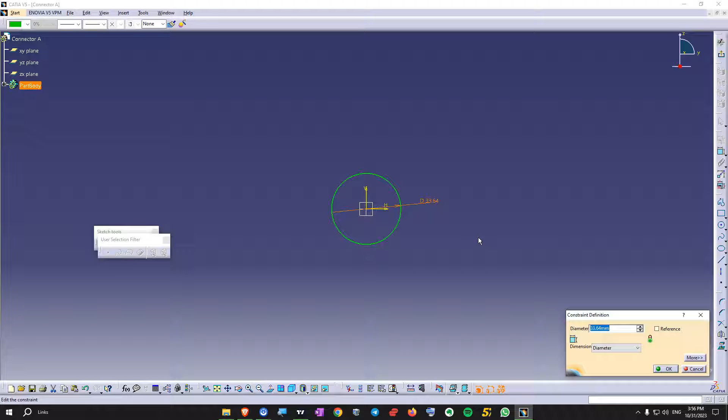First here I'm going to open a new part file. I'm going to call this file connector A. Click OK. So here we have connector A, and I'm going to draw a quick rectangle that is going to represent a connector. In fact, I'm going to make a cylindrical connector, I think it's easier. So in here, let's make the diameter of this, let's say it's 30. Exit this sketch, and I'm going to use the pad to make this longer. Let's see how much longer. Let's make this 80 millimeters.

This should be okay. So you need to know part design and assembly design in order to manipulate files, to modify files, and also to draw electrical objects like connectors, supports and other stuff, because sometimes maybe you need to design them yourself. Most of the times you're going to find those already to be downloaded as a step file from the supplier's website, and that's the first thing that you need to check, because the supplier has the perfect 3D model of that connector.

In my courses I show how to go on various international websites, how to actually go on the website of those suppliers and download connectors. So in my course there are a lot of connectors that you can download already from the videos. So this is the connector that we have.

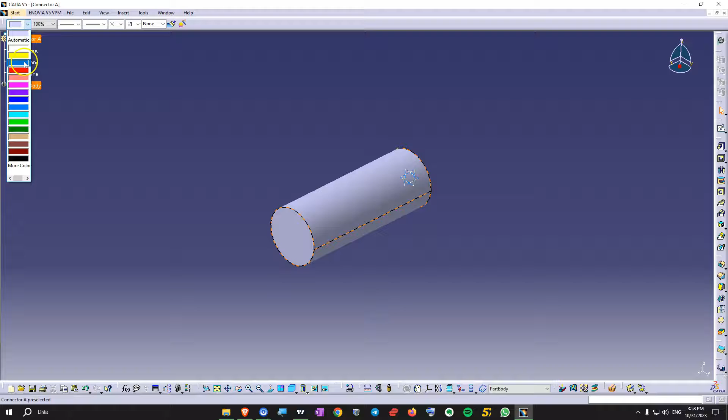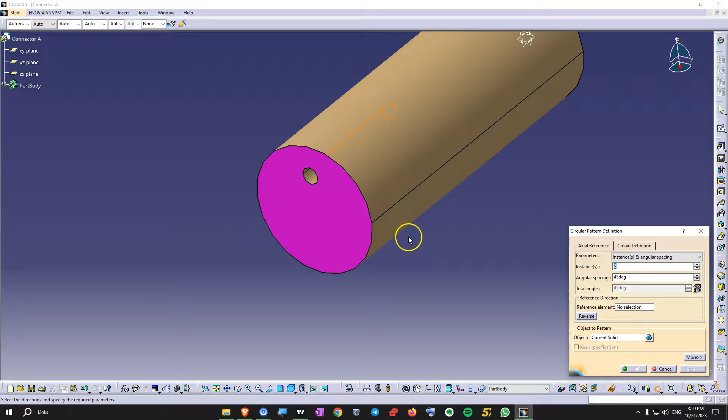Let's give this a color. So let's make this color, and I'm going to click on this face and give it another color. I'm going to imagine that this is the face that is going to connect, and in fact I can position a sketch here and just add a smaller circle. Let's make this 4 millimeters, should be okay. Let's make a pad here and make this 30 millimeters. So then from here I can just execute a circular pattern. Okay, so let's say this connector has 4 pins like here, and now I'm just going to hide the planes.

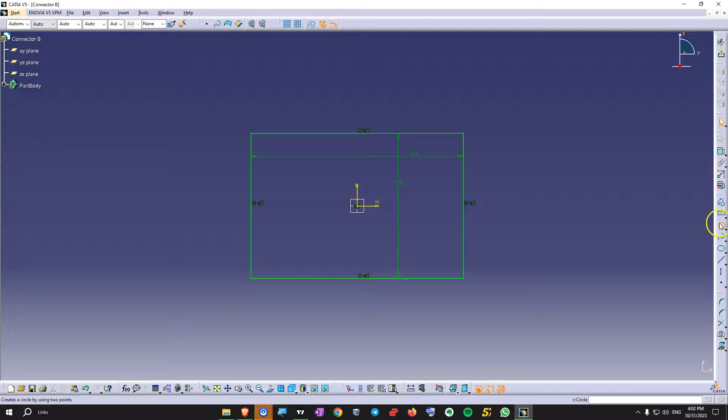I don't want to see them for now, and just save this somewhere in a folder. Save. So now let's make another file, another part file, connector B. This time I'm going to make a rectangle. And I would like to already design the counterpart for this connector. So I'm going to add here right in the middle something that is going to be 30 millimeters, but I would like this to be smaller. So let's make this, let's say 90, 90, and also this one. In fact, let's make this 70. So this is going to be the counterpart of the connector.

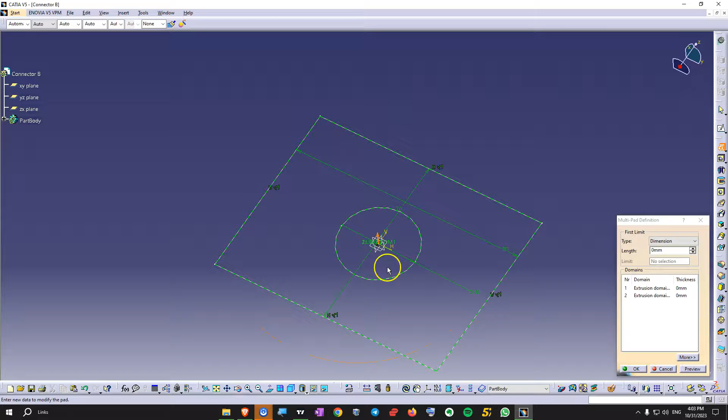Exit this sketch, and I would like to use here multipad. Let's make this one okay. So this one it's 40, connector is 80. Let's make this thicker.

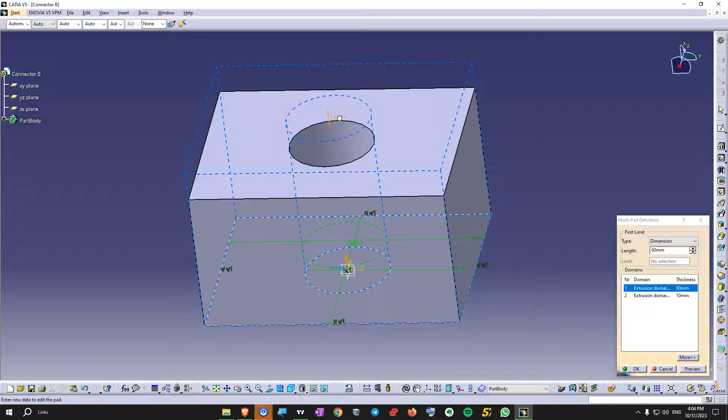So I'm going to hide the planes here, change the color, and inside here I'd also like to change the color like this, just so we can see. So those are the two connectors.

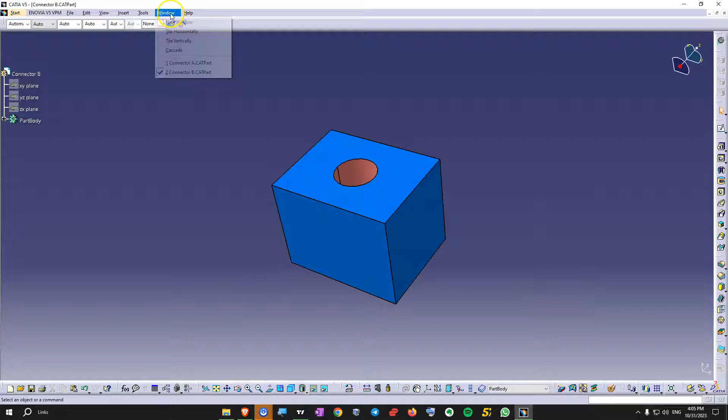I'm also going to save this, and I like to make those very simple, so as not to make this video too long, but this applies to every kind of connector you have. You just need to study the connectors and have electrical knowledge and know how connectors work in order to electrify them correctly, and I show a lot of that knowledge in the courses. That's why I'm trying to show here how the software works, to see how simple the software is, but it's not about the software. So now let's make a new product.

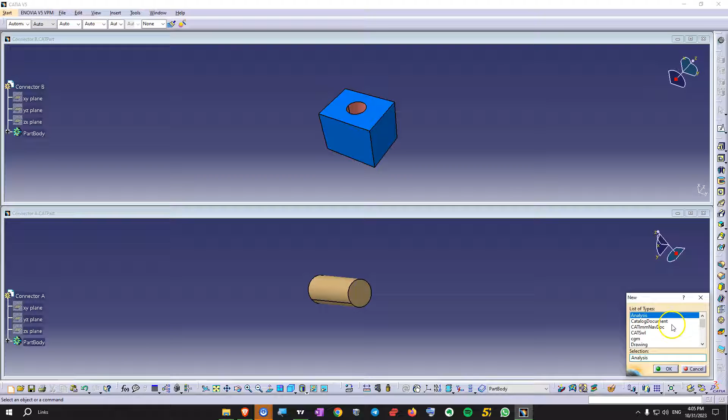So this product is going to be the electrical harness number 1, and I would like to make another product, and let's name this the project file. So this is like a basic organization of files in a Catia V5 electrical.

So those are not electrified yet. As you can see, those are made in part design and assembly design, because this is how it starts, and the electrical workbenches are going to transform those files into electrical files. But first you need to organize them.

Of course, you can make top-down construction, you can make bottom-up construction, you can be mixed. It doesn't even matter, if you know what you're doing. I know that many courses have this approach to Catia V5, and I've been asked by students, how do you do top-down assembly, how do you do bottom-up assembly? I explain that in the courses, and it just does not matter how you do it as long as you know what you're doing.

So in here, this is going to be the electrical harness. I'm going to add the electrical components into the electrical harness file. So I'm going to add this here and this one here with copy paste. This is basic Catia stuff. This is something you should need to know if you want to learn electrical harness. Otherwise you have to take my basic Catia V5 course.

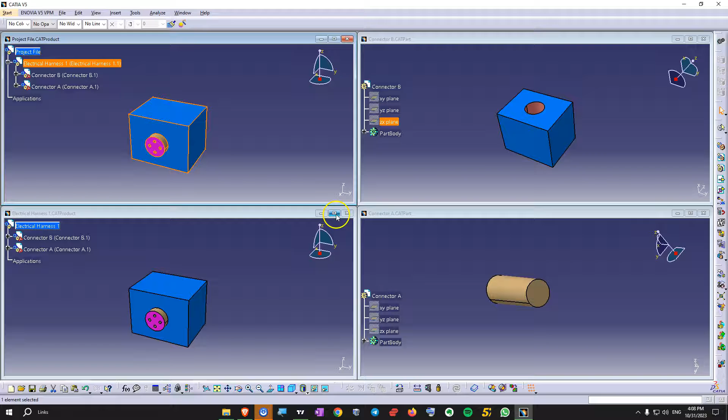And then this product, I'm going to add it into the project file. So here there are all of them, and I'm going to close just this one. But first of all, I would like to save all of them, so I can save here, because this is the general file. Save management. I look here, what's saved, what's not saved. Save as, this is a new file.

Save. Save, in the same folder. And the modified one, save. This is just open, it's not modified. And then click OK, so you can click again to verify. So now everything is saved.

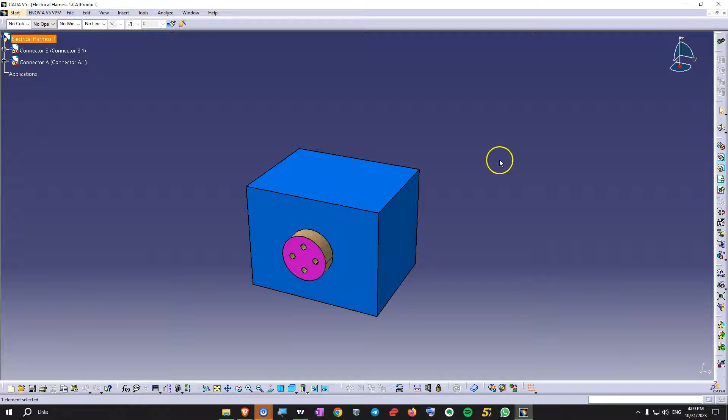And of course you can also check the folder to see that the files are in there. So in here, depending how you construct the files and how you have the datum planes, when you copy paste them, they might all come in the same position, but you can have a design standard to have them all also in the right orientation. That's also something that I teach in the course.

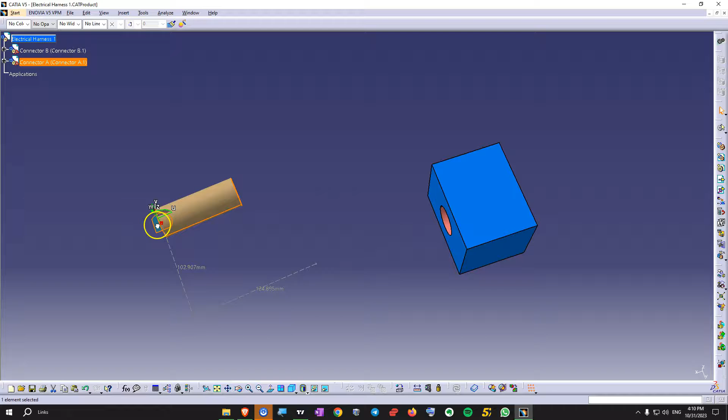It's a little too much to explain here. Maybe I'm going to make a separate video about it. Let me know in the comments if you understand what that is, and if you want a separate video.

So those are the two connectors, and now I'm going to go to the individual files and electrify them first. So this is the project file, electrical harness file. I want to close this one because I don't need it. So the idea here is that you need to make those files in such a way that they can be connected with a click, and also that we can connect wires.

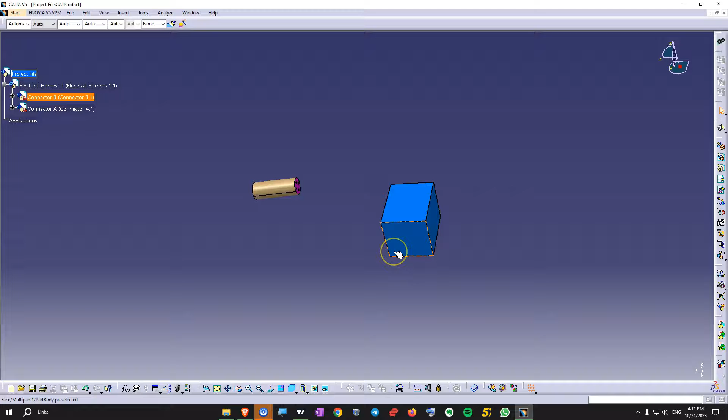So if I go into equipment and systems, electrical harness discipline here, and here we do electrical assembly design. Here on this toolbar, that is called electrical connection point definition, we have two buttons that are called connect electrical devices and disconnect electrical devices.

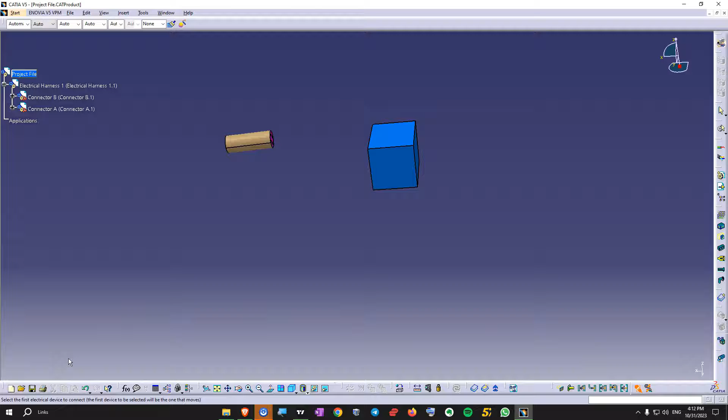So if I click on this one, the software says select the first electrical device to connect. The first device to be selected will be the one that moves. So if I select the electrical device and then I select the second one, they are going to connect between them, and the first one I click is going to be the one that moves to the other one. So now I cannot do that because those are not electrified.

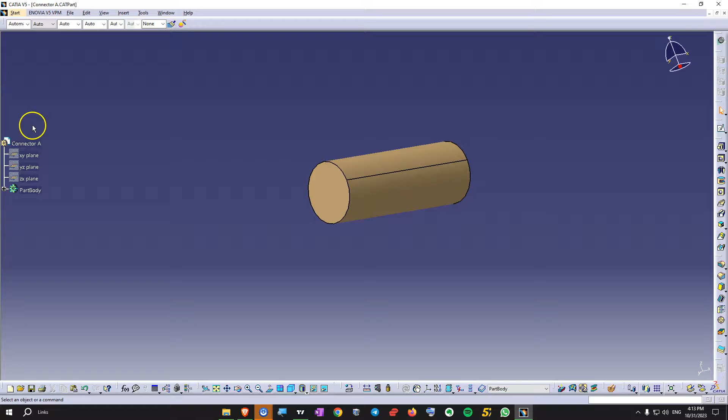I'm going to proceed to the first connector A, and we are going to electrify this. First, you need to make sure that the file is saved and that all the mechanical modifications are made. Then with the connector open, we go to equipment and systems, harness discipline, electrical part design. So this is the part design workbench, equivalent to part design, but as an electrical workbench.

So in part design, you build it from a mechanical point of view, from a solid point of view, and then when we switch to electrical part design, we give it electrical properties. So you see the buttons here change. So the idea is, on the front of the connector, we want to give electrical properties that is going to connect this connector with its counterpart.

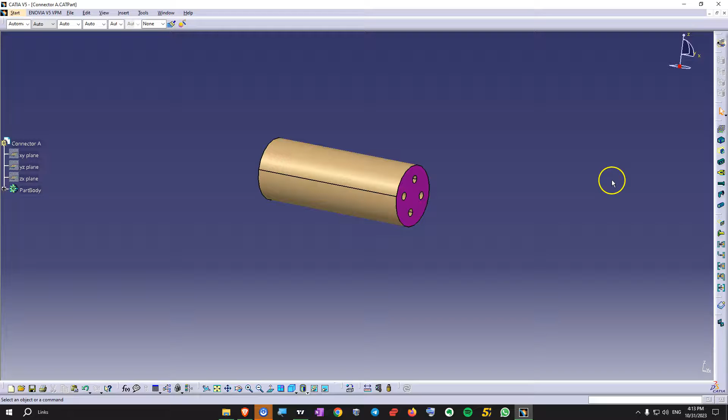And at the bottom here, or on the back side, we want to give electrical properties that are going to connect to a wire bundle or to an electrical wire. So let's start with this one. First, we need to define this part as a connector.

And this is the toolbar where you can do that. So if you look here on all those buttons, I have here define connector. I click on this one and the software says select a part with no electrical behavior, so a part that is not electrified. I select this one, and I have some options here, single insert connector.

We have other stuff here that I teach in the course, but for part number, I'm just going to leave it like this. Number of terminations means the number of pins that the connector has, or terminations. If you're an electrical engineer, you should know what those are. Now I'm going to just put here 4 and click OK.

You want to make sure that you do not mess this up, because you cannot modify or delete them. You need a backup of the file, so you need to delete the file from the computer and restart with the backup. Some of them can be deleted or modified, but some of them cannot. This is another question that I get from time to time, even if I explain it very clearly in the course.

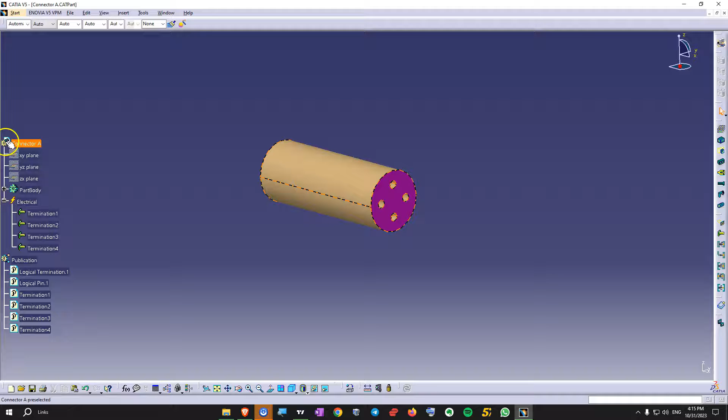Now you see here it's like a small extra thing on this icon. This means this is an electrical part or connector, so in fact it's the icon of the connector here. And now this one has electrical properties with 4 terminations. Those are important for other workbenches that connect with the diagram, the electrical diagram software.

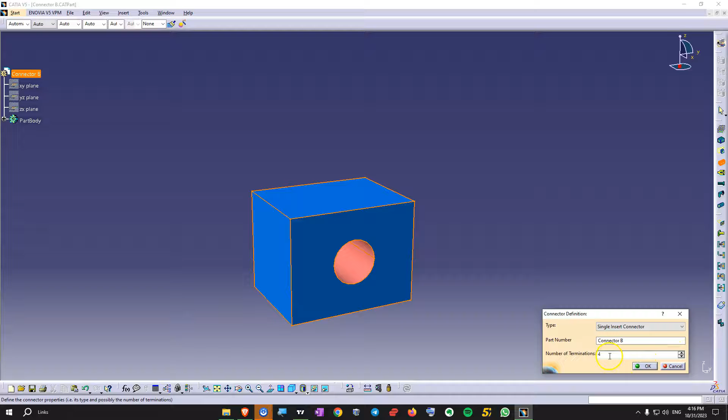Now I would like to save this and switch to connector B here. Let's do the same, let's define this as a connector. I'm going to click on this. Connector B needs to have the same number of terminations. If you do not have the same number of terminations, the software is going to tell you, because that does not make sense in reality. Click OK, I'm going to save this.

So this is just the definition. Now if I switch back to connector A, I need to make the connector connection point. So this is the point, this is what the software is going to use to connect this with its counterpart. And here we have different connection points.

This one is defined connector connection point. If I click on it, it says select a single connector, a multi-connector, or a connector connection point. If I click on this one, because this is defined as a connector, we have here connector connection point 1. This is the automatic name that I'm not going to change. We have representation, contact, coincidence, and orientation, and those are placement constraints. They work like the constraints in assembly design.

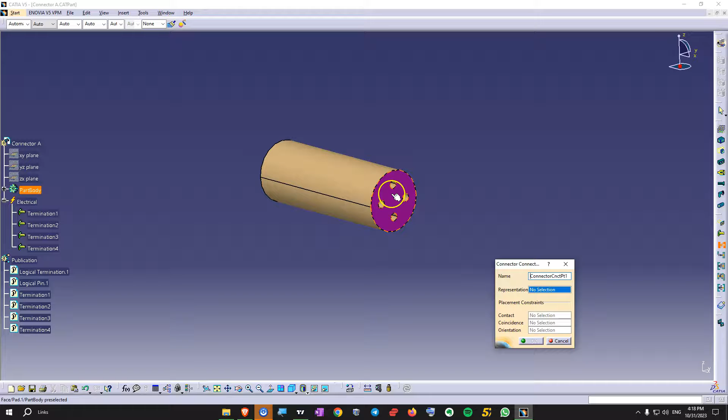So the representation is going to be the face where I want this connection point to be annotated in 3D. I'm going to choose this side, because on the other side maybe I have another type of connection point. So I'm going to choose this surface.

Then the contact is going to be the head of the connector, that basically when you push it into its counterpart, the contact is going to be a surface that stops the connector from being pushed forward. So it can be the face of the connector, or it can have like an edge. In this case we do not have an edge. We can design one, but I'm going to choose the same surface, the head of the connector. This is going to stop the connector from being pushed forward.

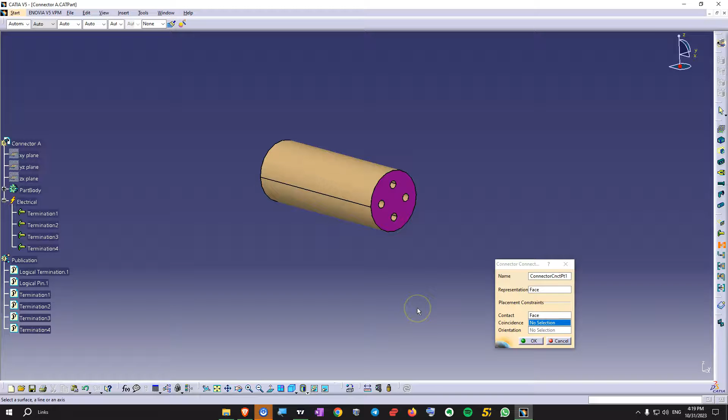Coincidence is going to be the coincidence to align the connector into its counterpart hole. In this case, it's going to be the central axis because this is cylindrical. So here, the software is automatically selecting the central axis. I'm going to click on that.

And the orientation is going to be a plane or an axis that is going to tell the software how to rotate the connector inside its counterpart. This can be based on pins, or it can be based on a Poka-yoke key that the connector has. Again, if you don't know what a key or a Poka-yoke key is, that's just electrical knowledge about connectors that I also explain in the courses. So here, I'm going to use one of those pins because it's convenient as orientation. I'm going to use this one here and click OK.

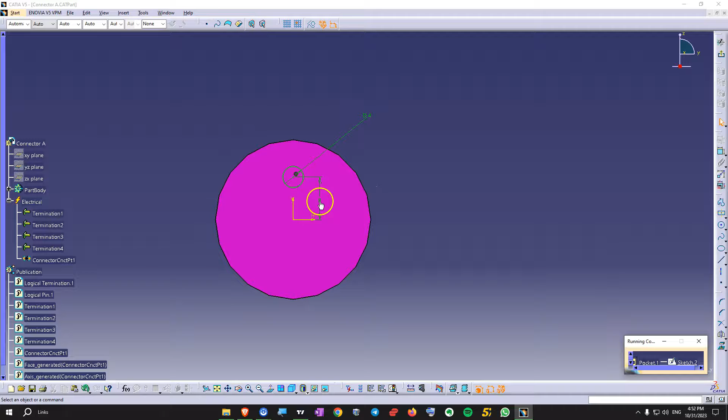So now we have all the elements that the software is going to use to position the connector accordingly. One last thing that I want here is to check those pins. So it's 8 from the center with 4. Here I would like to do the same thing on this surface.

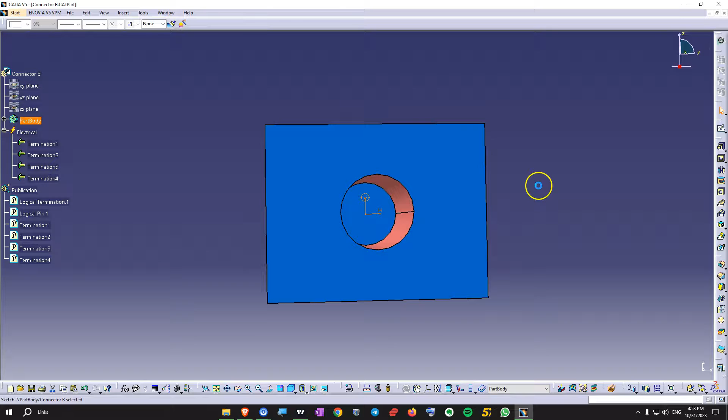So I'm going to go to part design, position a sketch here. I'm going to position a circle, with a diameter of 4, and I want to make this at 8 millimeters from the horizontal axis. The holes for the pins in the connector are 30 millimeters, and I'm going to make those ones shorter, I'm going to make this one 20 millimeters. It's enough just for this demonstration. And then circular pattern, 90 degrees.

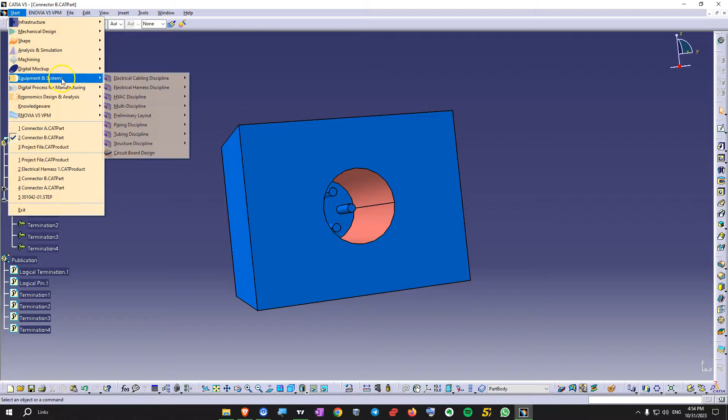Click OK, so those are the pins. And we are going to make here the same electrification. So if I go into Equipment and Systems, Electrical Harness Discipline, Electrical Part Design.

This is already defined as a connector with 4 terminations. I only need to define the connector connection point. Click on this, click on this.

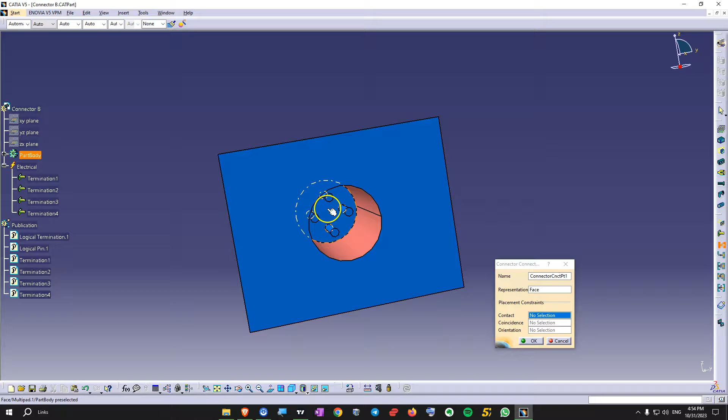For a representation, I can use this external surface or I can use this internal surface here. So let's use this one on the interior just to show where the actual connection point is. Contact is going to be this surface that gets in contact with the surface from the counterpart, the physical surfaces I'm referring to.

The coincidence is going to be the same axis that gets into coincidence from the connector and the counterpart, so it's going to be the axis of this hole. And the orientation, I have to use one of those pins, and it has to be the exact same pin as the connector counterpart.

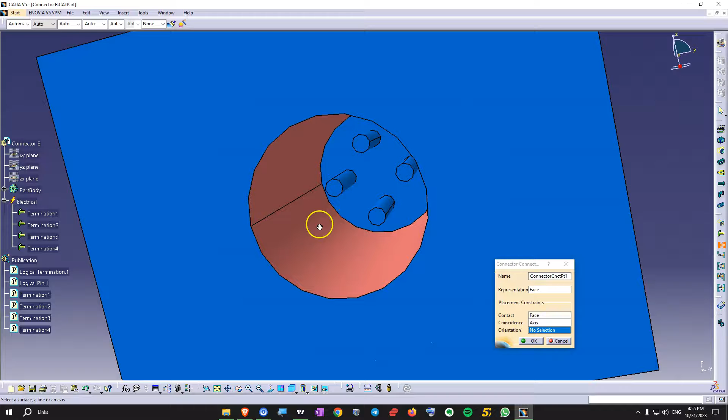So in this case, let's say this is the pin. I'm going to click OK. So now let's save this, and I'm also going to save this one.

If I go into the project file here, I want to activate the product where the electrical components are inside, so this is going to be the electrical harness. I want to make sure that this is active. This is basic Catia V5 stuff.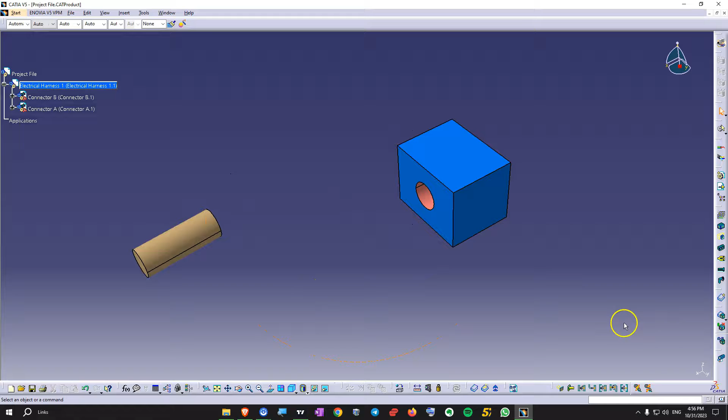If I use those buttons we were discussing at the beginning of the video, connecting electrical devices, if I click on it and hover only on this connector, now you see the software is going to allow me to select this. So if I select this one, now the software says select the second electrical device to connect, or directly a connection point.

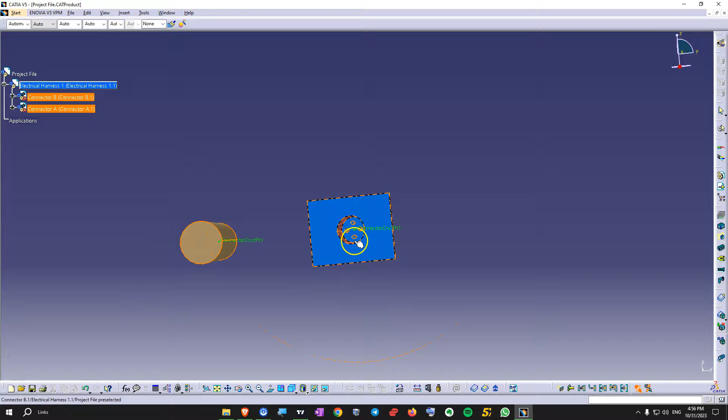So in here, only if I hover, it's going to show me the connector connection points. This is the representation we selected, this surface here, where it's annotating the number, the name of the connector point, and here the same.

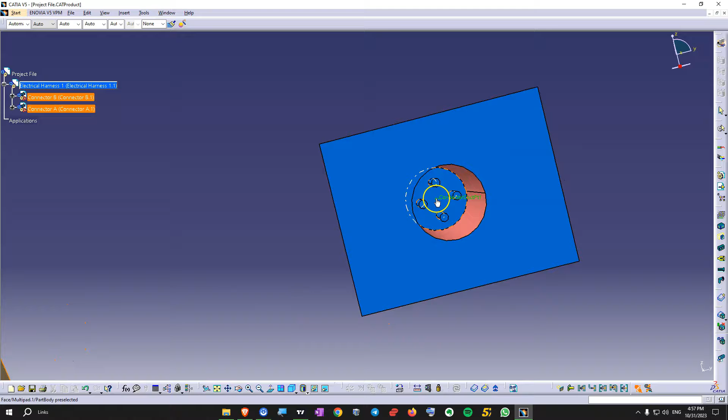So now, if I click, I need to click on that specific place, closer to that. So if I click here, this connector is going to go right there. Let's see if it's correct.

So it's automatically creating here some constraints, and in here you're going to see those constraints that are automatically created. I would like to hide those because I don't want to see them. And now let's see if the mechanical connection is correct here.

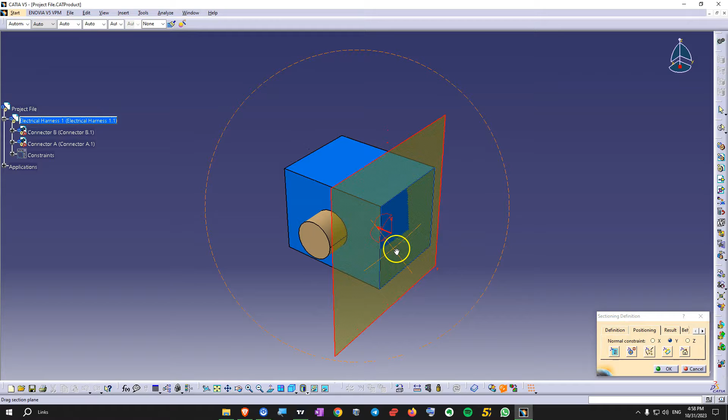So the first time when you electrify connectors and connect them, you want to verify this, go into assembly design and use the sectioning tool to see how the connection is, if everything's okay.

I want to take a close look. I see the pin inside, that's great, the other two pins and the third pin. So this is great, and now I can kind of rotate this to look around the connector.

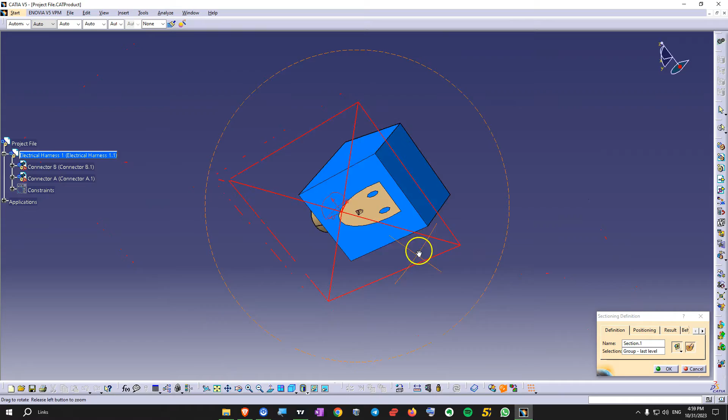I want to make sure that it's all good here, so everything is aligned. Also here, so you can see the pins are where they're supposed to be. Let's also see from above. So everything is correct here.

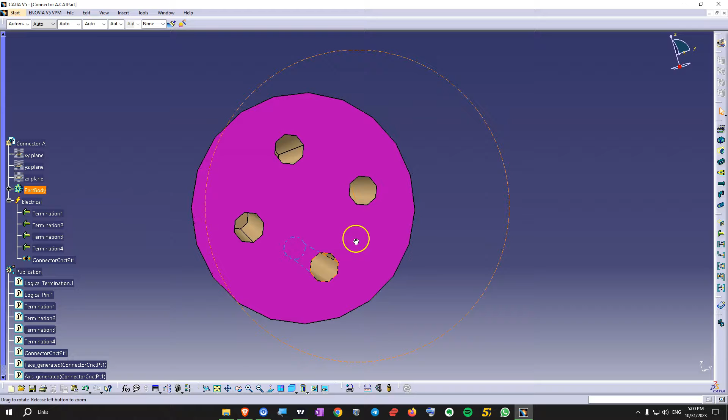Another thing you can do here, this is not necessarily important, but you can actually assign an element to each termination, a representation. So let's say for this one, it can be this surface or this surface here at the end. Usually it should be the surface that has the electrical contact, the metallic surface of the pin.

So if this is termination number 1, just double click on it. We have the name here, you can change the name. You can write pin 1 or whatever other name this pin might have.

And the termination, I can just select this surface, this face. When I click on it, it's going to show me what that pin is, pin number 1, 2, 3, 4, 5. So it would be correct to do that, so on the 3D model you know which is pin 1 and which is pin 20, or maybe you have 50 pins, who knows how many pins you have on that connector.

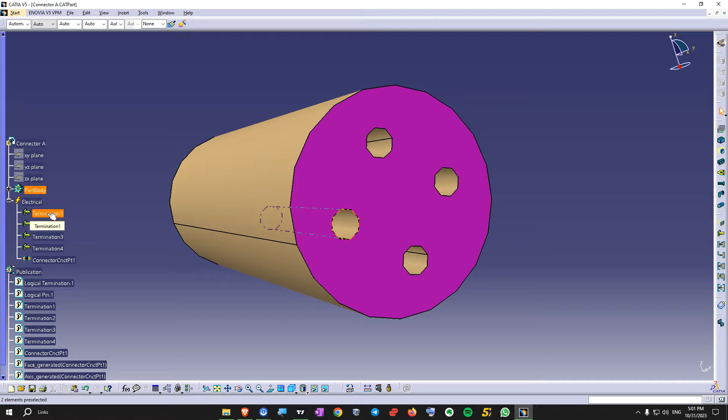So let's save this, I'm going to close this, go and also close the connector B, and I'm going to save the file. So I'm going to save all of those and close them.

And in part 2 of this video, we are going to see how we create the other electrical point, which is for the wire, and how we connect wires and how we can play around with that wire, and maybe do a small wire routing on a path.

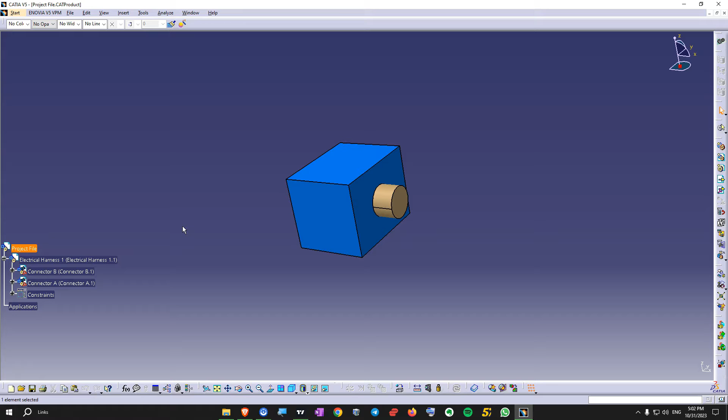So there is nothing to download on this video. That's why I did those connectors very simple, so you can also make them with your own software. If you also did those and everything I showed in this video as an exercise, just save them and keep them in your computer, and you can use them in part 2 of this video. So see you in the next video.